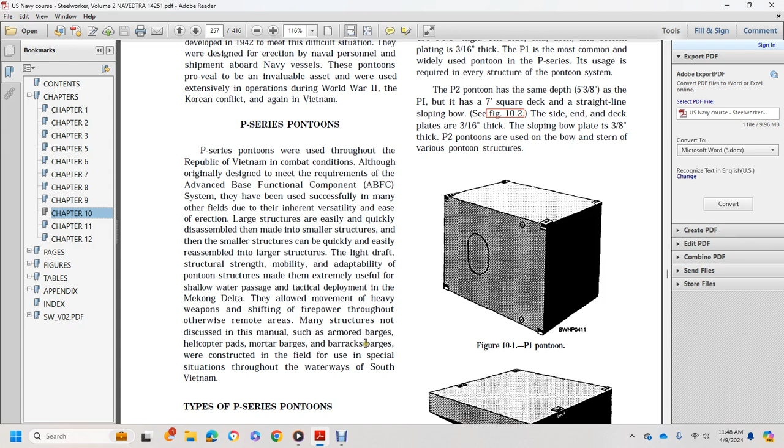Shallow water passage and tactical deployment in the Mekong Delta. They allowed movement of heavy weapons, shifting firepower throughout otherwise remote areas. Many structures not discussed in this manual, such as armored barges, helicopter pads, mortar barges, and barracks barges, were constructed in the field for use in special situations throughout the waterways of South Vietnam.

Types of P-Series pontoons. Five basic P-Series pontoons are used today: P1, P2, P3, P4, P5. These pontoons are specially designed, internally reinforced welded steel cubes. They are tested with an internal pressure of 20 pounds per square inch. All pontoons have plain deck plates covered with a non-skid coating and are fitted with a 2-inch plugged hole, air drain and siphon connections at the top and bottom of one end.

The P1 pontoon is cubical in shape. See Figure 10.1. The deck of the P1 is 5 foot 3 1/8 inches by 7 foot, with sides 5 foot 3 1/8 inches high. Side, end, deck, and bottom plating is 3/16 of an inch. The P1 is the most common, widely used pontoon in the P-Series, and its usage is required in every pontoon structure system.

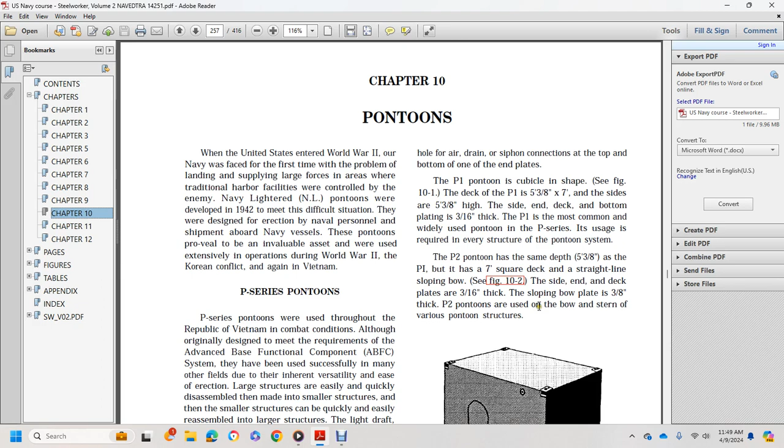The P2 pontoon has the same depth of 5 foot 3 1/8 inches as the P1, but has a 7 foot square deck and a straight line sloping bow. See Figure 10.2. The side, end, and deck plates are 3/16 of an inch, and the sloping bow plate is 3/8 of an inch thick. The P2 pontoons are used on the bow and stern of various pontoon structures. Figure 10.1 shows the P1 pontoon. Figure 10.2 shows the P2 straight line sloping bow pontoon.

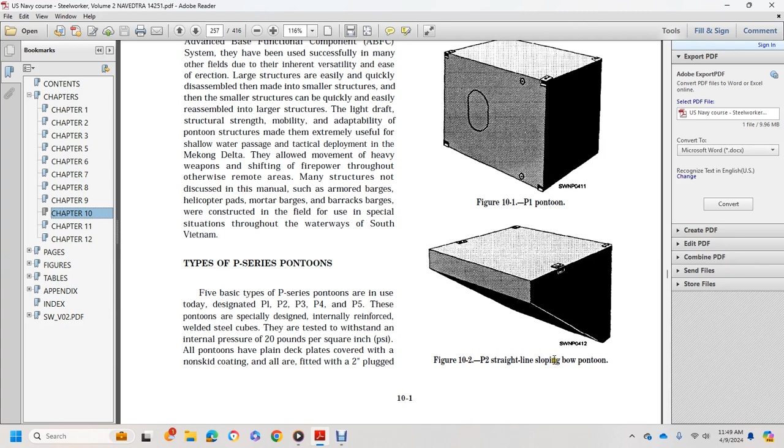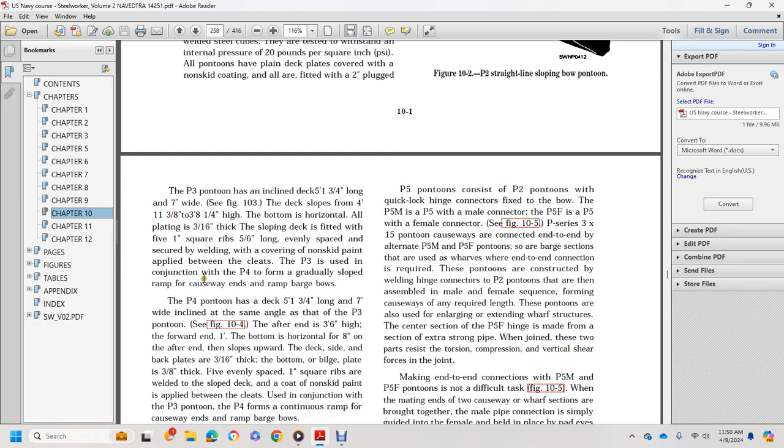Alright, the P3 pontoon has an inclined deck 5 foot 1 3/4 inches long and 7 foot wide. The deck slopes from 4 foot 11 3/8 inches to 3 foot 8 1/4 inches. The bottom is horizontal, with plating of 3/16 of an inch. The sloping deck is fitted with 1 inch square ribs, evenly spaced, secured by welding, with a covering of non-skid paint applied between the cleats. The P3 is used in conjunction with a P4 to form a gradual slope ramp for causeway ends and ramp barge bows.

The P4 pontoon has a deck 5 foot 1 3/4 inches long and 7 foot wide, inclined at the same angle as the P3 pontoon. The after end is 3 foot 6 inches high; the bottom is horizontal for 8 inches at the after end and then slopes upward. Deck, side, and back plates are 3/16 of an inch thick. Bottom and bilge plates are 3/8 of an inch thick.

Finally, 5 evenly spaced 1 inch square ribs are welded to the sloped deck, with non-skid paint applied between the cleats. Used in conjunction with a P3 pontoon, the P4 forms a continuous ramp for causeway ends and ramp barge bows. Figure 10.3 shows the P3 sloped deck pontoon. Figure 10.4 shows the P4 ramp end pontoon.

The P5 pontoons consist of P2 pontoons with quick lock hinge connectors fixed to the bow. The P5M is the P5 with a male connector. The P5F is the P5 with a female connector. See Figure 10.5. P-Series 3 by 15 pontoon causeways are connected end to end by alternate P5M and P5F pontoons, as are barge sections or wherever end-to-end connection is required. Pontoons are constructed by welding hinges to the P2 pontoons, then assembled in male-female sequence, forming causeways of any required length. The pontoons are also used in enlarging and extending structures.

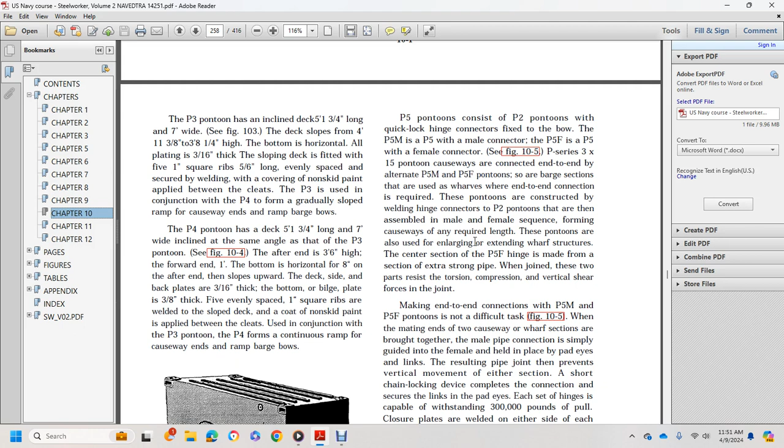The center section of the P5F hinge is made of extra strong pipe, which, when joined with the two parts, resists torsion, compression, and vertical shear force of the joint.

Making an end-to-end connection of P5M male and female pontoons is not a difficult task. When the mating ends of the two causeway wharf sections are brought together, the male connecting pipe is simply guided into the female and held in place with pad eyes and vertical links, resulting pipe joint that prevents vertical movement at either section.

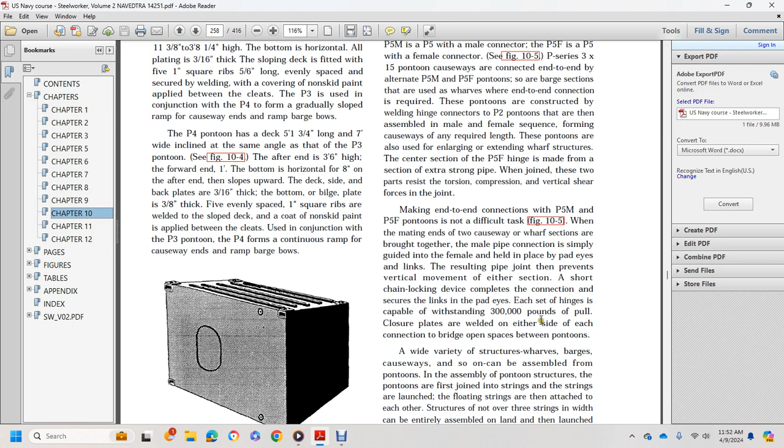To assemble the pontoon structure, the pontoons are first joined and strings are formed. Floating strings are then attached to each other. Structures not over 3 strings wide can be entirely assembled on land, then launched as a unit.

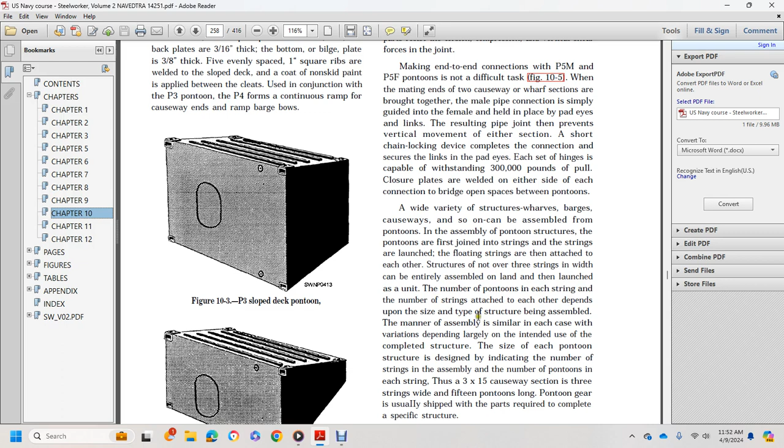The number of pontoons in each string and the number of strings attached depends upon the size and type of structure being assembled. The manner of assembly is similar in each case, with variation depending largely on the intended use of the completed structure. The size of each pontoon structure is designated by indicating the number of strings.

Assembly size is also designated by the number of pontoons in each string. For example, there are 3 by 15 causeway sections, meaning 3 strings wide and 15 pontoons long. Pontoon gear is usually shipped

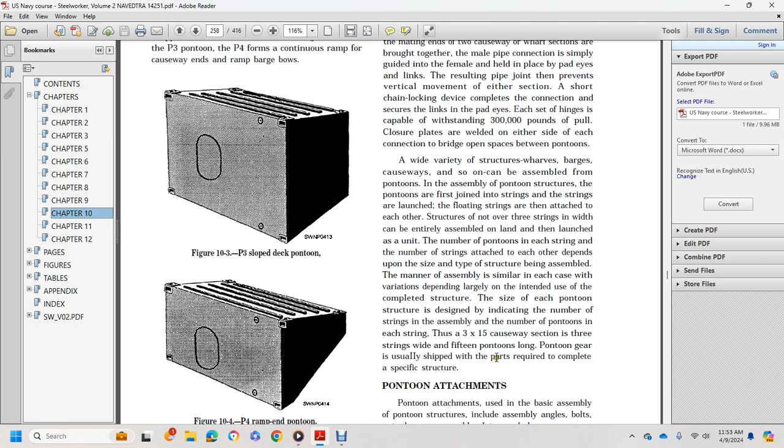with the parts required to complete the specific structure. Pontoon attachments used in basic assembly of pontoon structures include assembly angles, bolts, nuts, keepers, assembly plates, and closures.

Figure 10.5 shows the end-to-end connection of P5 male and P5 female pontoons. The male is on the bottom, the female is on top. It also shows the pad closure and assembly pad.

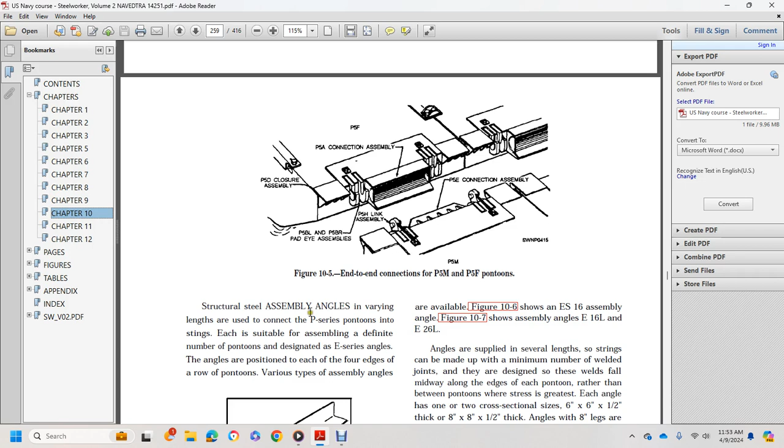Each assembly has a definite number of pontoons designated with the E series angle, with the angles positioned at each of the 4 edges of the row. Various types of pontoon assembly angles are available, shown in Figure 10.6.

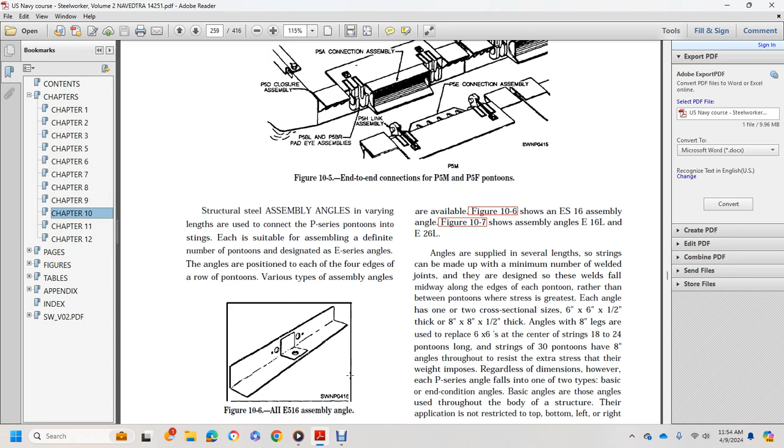Figure 10.6 shows the ES16 assembly, and Figure 10.7 shows the E assembly angles E16L and 26L. These angles are supplied in several lengths so that strings can be made with a minimum number of weld joints.

These designs place the welds midway along the edge of each pontoon, rather than between the pontoons where stress is greatest. Each angle is available in 1 of 2 cross-sectional sizes: 6 inches by 6 inches by 1/2 inch thick, or 8 inches by 8 inches by 1/2 inch thick.

Angles with 8-inch legs are used to replace the 6 by 6 angles on the center strings, which are 18 to 24 pontoons long. Strings of 30 pontoons have an 8-inch angle throughout to resist the extra stress imposed by their weight.

Regardless of dimension, however, the P-series angle falls into one of two types: basic angles or end condition angles.

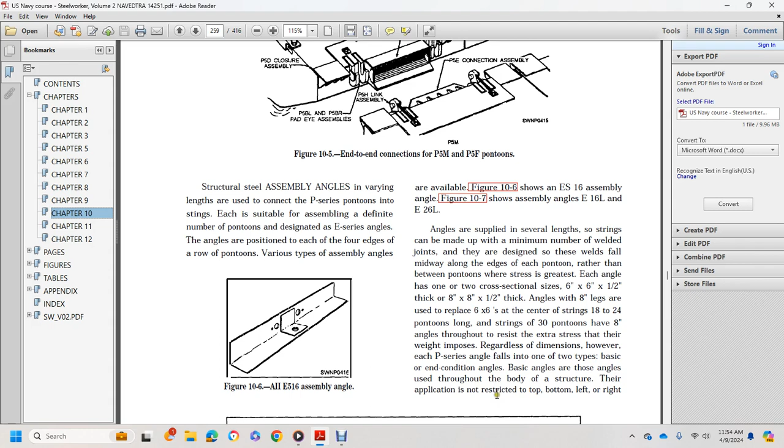Basic angles are those used throughout the body of the structure; their application is not restricted to the top, bottom, left, or right. Figure 10.6 shows the ES16 assembly angle, and assembly angles E16L and E26L are shown in Figure 10.7.

End condition angles, on the other hand, are used for the P2, 3, and 4 pontoon strings, each designated for a specific orientation: top and bottom, right and left.

Basic angles are shortened or lengthened to make up modified configurations. End condition angles can be cut and formed from basic angles to meet abnormal requirements.

The A6B assembly bolt is 1.5 inch diameter by 3 and 3/8 inch long, with a hexagonal head, a coated steel bolt with 3 radial grooves in the head spaced 120 degrees apart, rated grade 5 steel with a tensile strength of 105,000 psi.

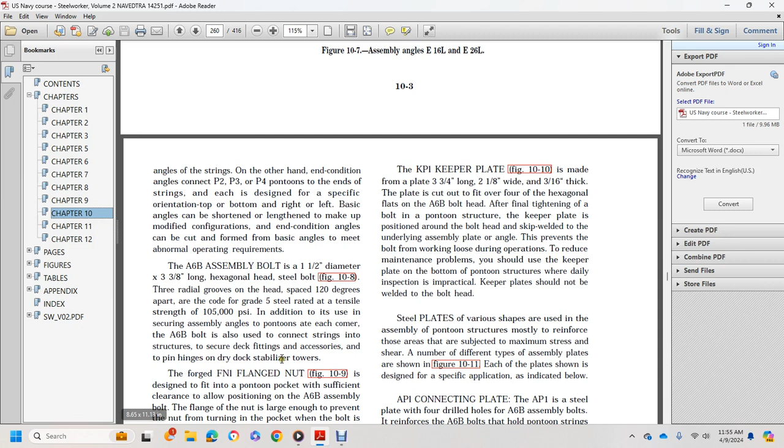In addition to securing the assembly angle at each corner of the pontoon, the A6B bolt is used to connect strings into structures, secure deck fittings and accessories, and pin hinges on dry dock stabilizer towers. The forged FN1 flange nut, shown in Figure 10.9, is designed to fit into the pontoon pocket with sufficient clearance to allow positioning of the A6B assembly bolt.

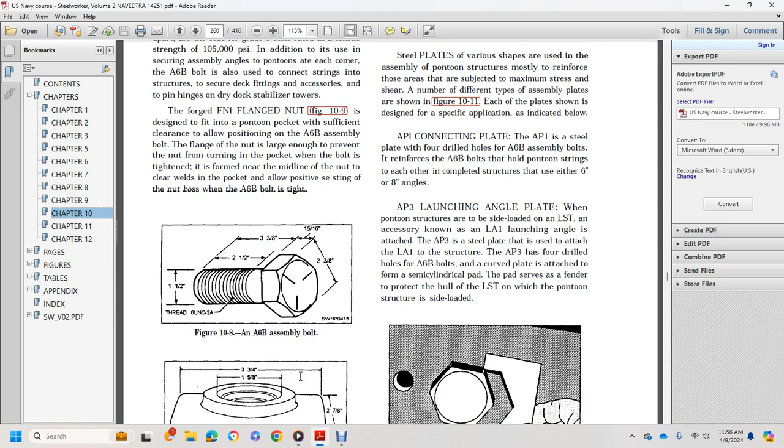Figure 10-8 shows the A6B assembly bolt and the FN1 flange nut. The KP1 keeper plate is made with a plate 3 3/4 inches long by 2 1/8 inches wide by 3/16 thick, and the plate is cut out to fit over the hexagonal flats of the A6B bolt head.

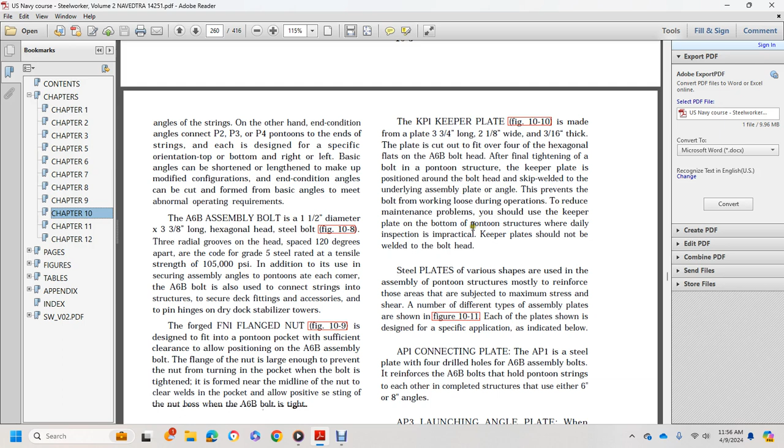After finally tightening the bolt, in a pontoon structure, the keeper plate is positioned around the bolt head and skip welded to the underlying assembly plate or angle. This prevents the bolt from working loose during operation. To reduce maintenance problems, use the keeper plate on the bottom of the pontoon structures where daily inspection is impractical. The keeper plate should not be welded to the bolt head.

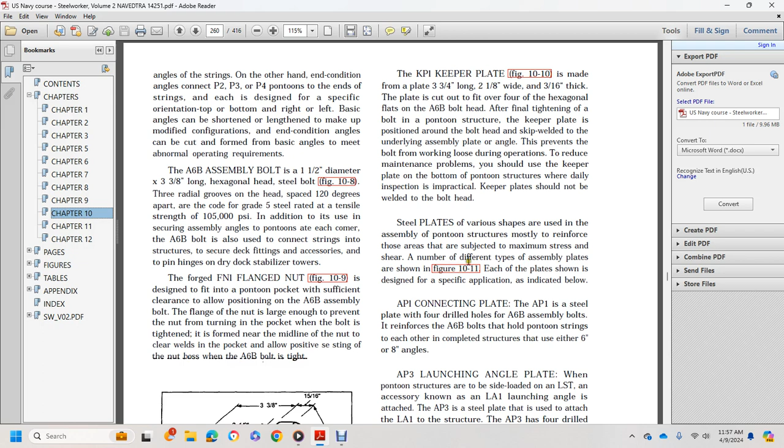Steel plates of various shapes are used in assembly with the pontoon structures, mostly for reinforcing areas subjected to maximum stress. A number of different types of assembly plates are shown in Figure 10-11, each designated with a specific application indicated below.

The AP1 connecting plate is a steel plate with 4 drilled holes for the A6B assembly bolts, used to reinforce the A6B bolts and join pontoon strings to each completed structure with either 6-inch or 8-inch angles.

The AP3 launching angle plate is used when pontoon structures are side-loaded onto the LST, using accessories known as the LA1 launching angle attachment. The AP3 is a steel plate used to attach the LA1 structure, and it has 4 drilled holes.

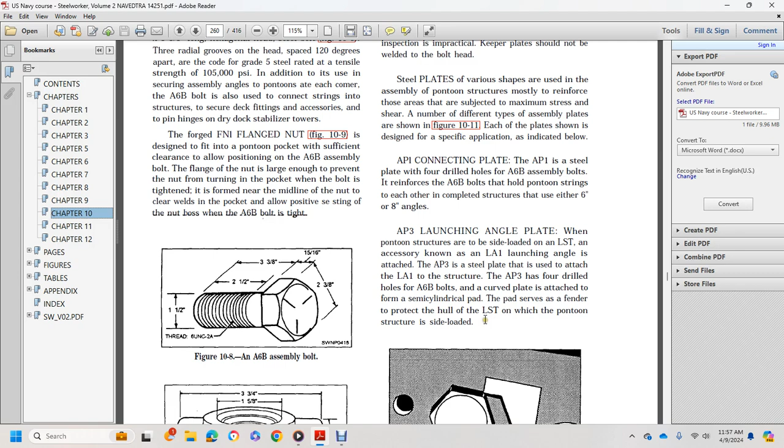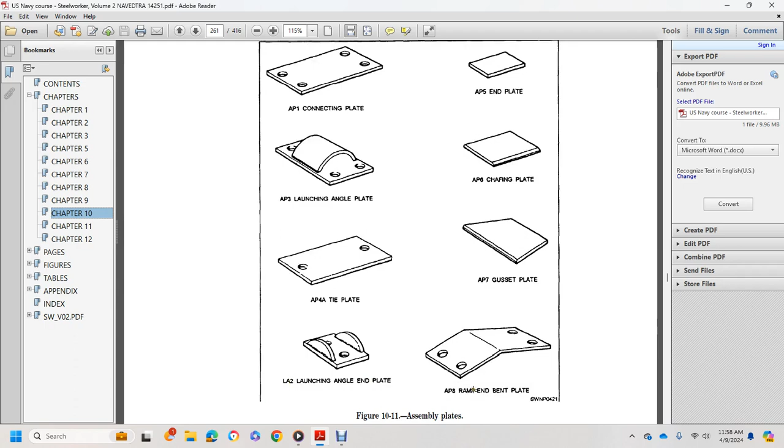The AP4A tie plate is a steel plate with 2 drilled A6B holes used to connect pontoon strings to each other at the bow and stern ends where necessary, as an acceptable substitute. AP4A can be obtained by cutting the AP1 connection plate in half across the narrower dimension; 2 plates are produced for both.

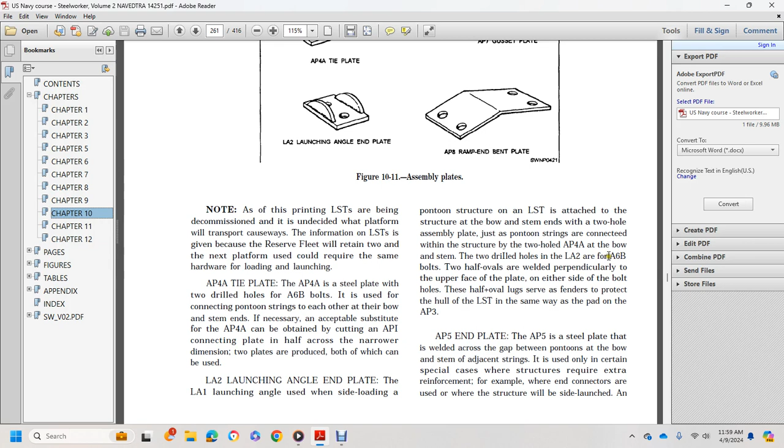Two half-oval lugs are welded perpendicular to the upper face of the plate on either side of the bolt. These half-oval lugs serve as a fender to protect the hull of the LST in the same way as the AP3 pad.

The AP5 end plate is a steel plate welded across the gap between the pontoons at the bow and stern of adjacent strings, used only in certain special cases where structures require extra reinforcement, for example where end connectors are used on side-launched structures.

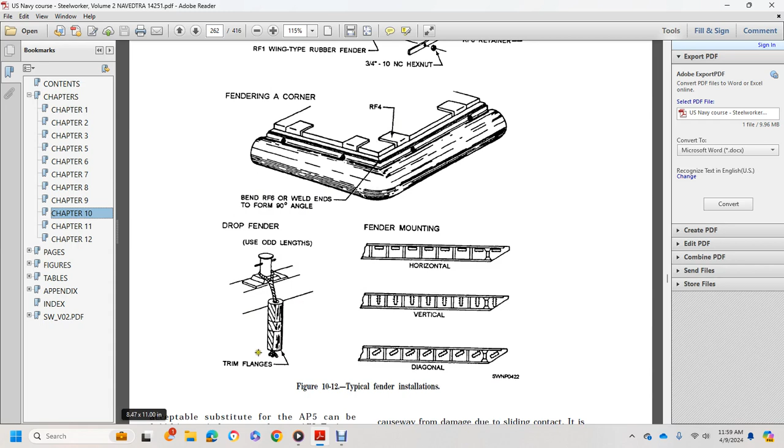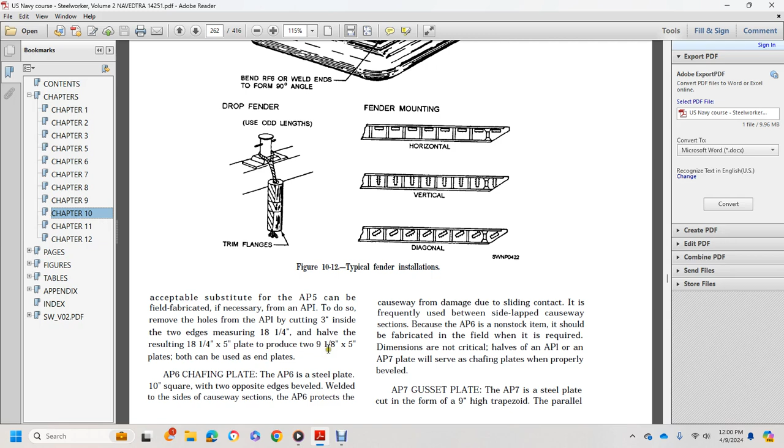The AP6 chafing plate is a steel plate, 10 inches square, with 2 opposite edges beveled, welded to the sides of the causeway section. AP6 protects the causeway from damage due to sliding contact. It is frequently used between side-lapped causeway sections, and since AP6 is a non-stock item, it should be fabricated in the field when required; dimensions are not critical.

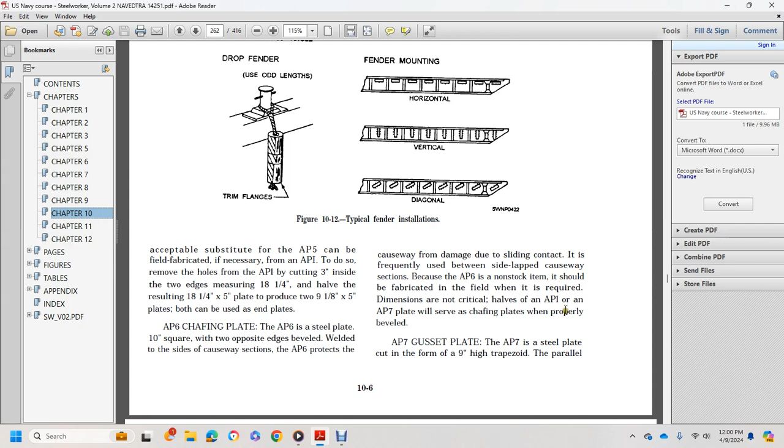The AP1 or AP7 plate will serve as a chafing plate when properly beveled. The AP7 gusset plate is a steel plate formed as a 9-inch high trapezoid with parallel sides.

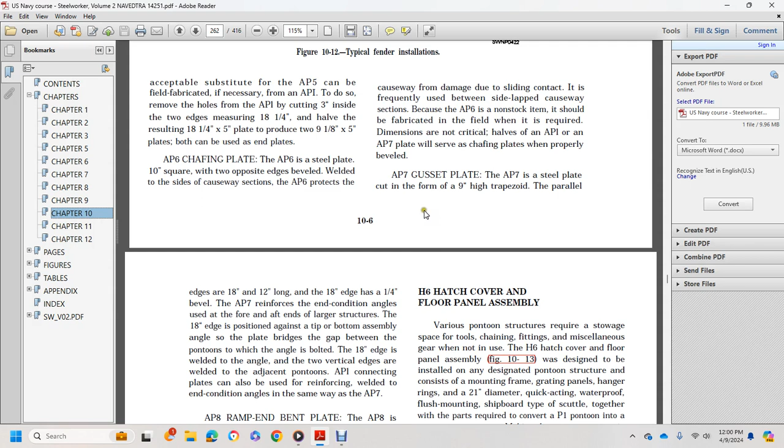Edges 18 inches and 12 inches long with the 18-inch edge at a 1/4 inch bevel. The AP7 reinforces the end condition angle with the end of the large structure for the 18-inch edge position against the tip of the bottom of the angle plates, bridging the gap between the pontoons. The angle's 18-inch edge is welded to the angle, and the two vertical edges are welded to adjacent pontoons.

The AP1 connection plates can also be used for reinforcing, welded to the end condition angle, same as the AP7 plate.

The AP8 ramp end bent plate is a fabricated steel plate, 11 inches by 20 and a quarter inches, rectangular, bent for the two legs, 8 and 5/8 of an inch over the 11 and 5/8 of an inch long. Each leg has 2 drilled holes.

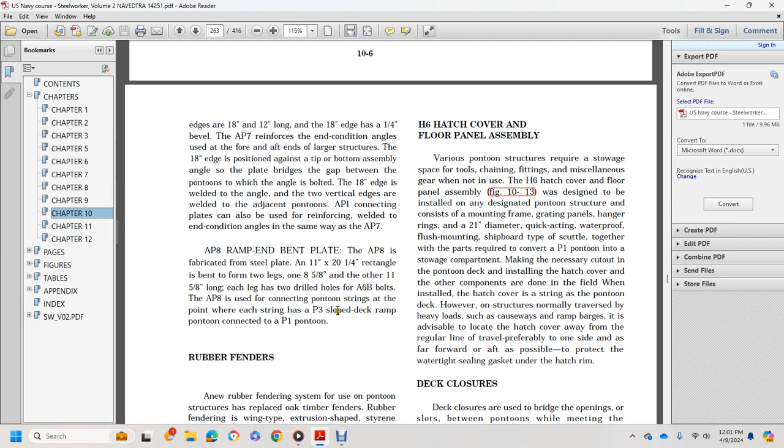The A6B bolts the AP8 using the connection pontoon strings over the point where each string connects with the P3 slope deck ramp pontoon connected in the P1 pontoon.

Rubber fenders. A new rubber fendering system is found on the pontoon structures, replacing the oak and timber fenders with the rubber fendering wing type.

The extrusion shape of the styrene butadiene composition is supplied in random lengths, cut, formed, and fitted to the specific structure's operating conditions.

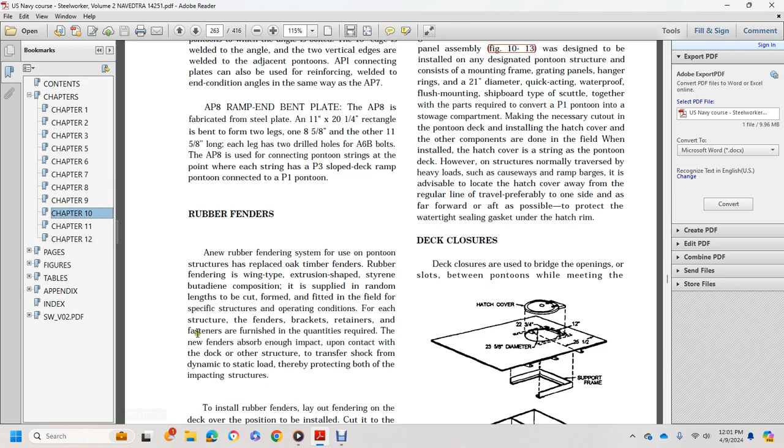Structure fender brackets, retainers, and fasteners are furnished in quantities required by the new fenders to absorb enough impact from contact with the dock or other structures, transferring shock from dynamic to static loads, thereby protecting the pontoon structures.

To install rubber fenders, lay out with the fender deck over the position, installed and cut to the required bolt length, with the retainer bracket positioned using attached lines. Tack weld brackets are placed with temporary removal of the lines.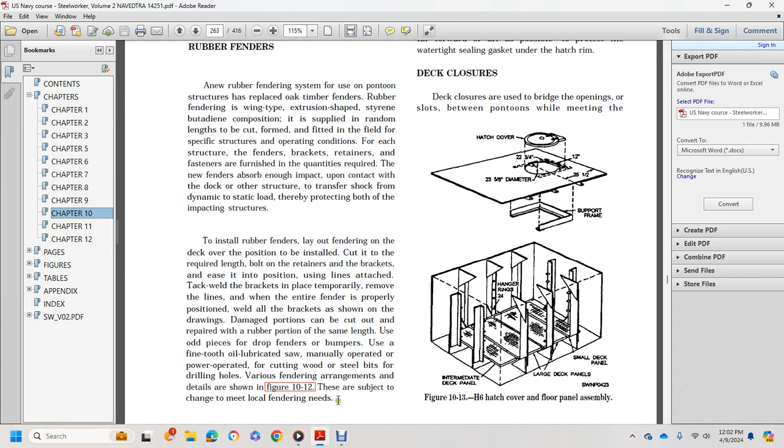Use an odd piece for the drop fenders or bumpers. Use a fine-tooth, oil-lubricated saw, manually or power operated, for cutting wood or steel bits, and drill holes for various fendering arrangements. Details are shown in Figure 10-12. They are subject to change to meet local fendering needs.

Figure 1013, designed to install on any designated pontoon structure, consists of mounting frames, grating, panels, hangers, rings, and a 21-inch diameter quick-acting waterproof flush mounting shipboard type scuttle, together with the parts required to convert a P1 pontoon into a storage compartment.

This requires making necessary cutouts in the pontoon deck and the hatch cover. The other components are installed in the field, fitting the hatch cover to the string in the pontoon deck.

However, since the structure is normally traversed by heavy loads such as causeways, ramps, and barges, it's advisable to locate the hatch cover away from the regular line of travel, preferably to one side, as far forward and aft as possible, to protect the watertight sealing gasket of the hatch rim.

Deck closures are used to bridge openings and slots between pontoons while meeting them. Alright, showing the hatch cover.

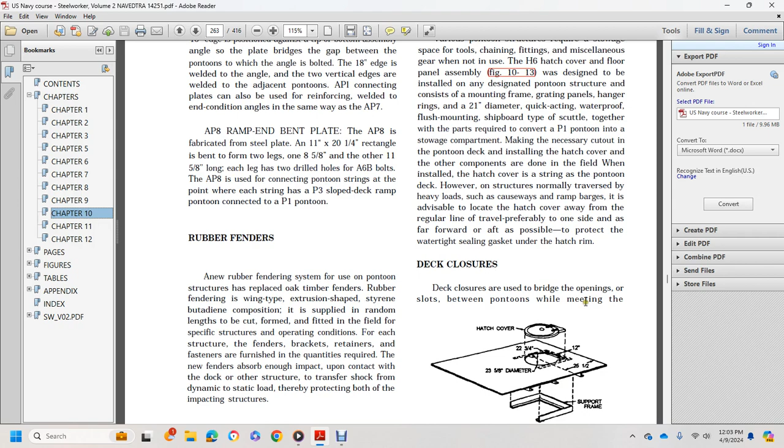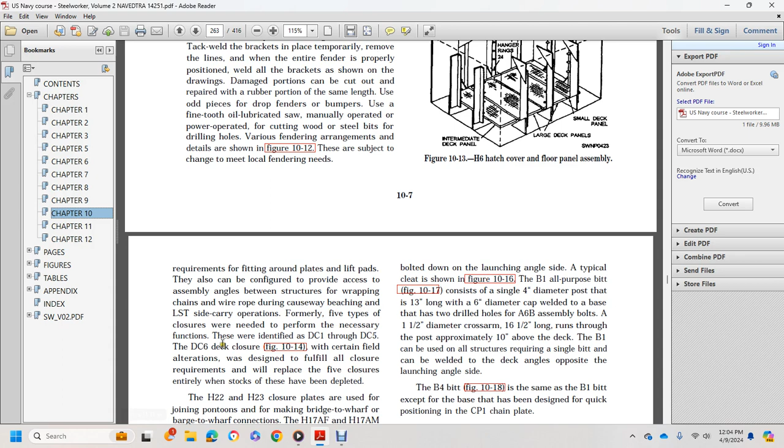For LST side-carry operations, there are formerly 5 types of closures needed to perform the necessary function. Identified as DC1 through DC5, deck closures will certainly be field-altered as needed to fulfill all closure requirements.

The H22 and H23 closures are not included in the heavy-duty hinge set, but are fabricated in the field as required. Bitts and cleats are steel posts with arms to which lines are secured for structural or side carrying, and should have bits as well as deck fittings. DC deck closure.

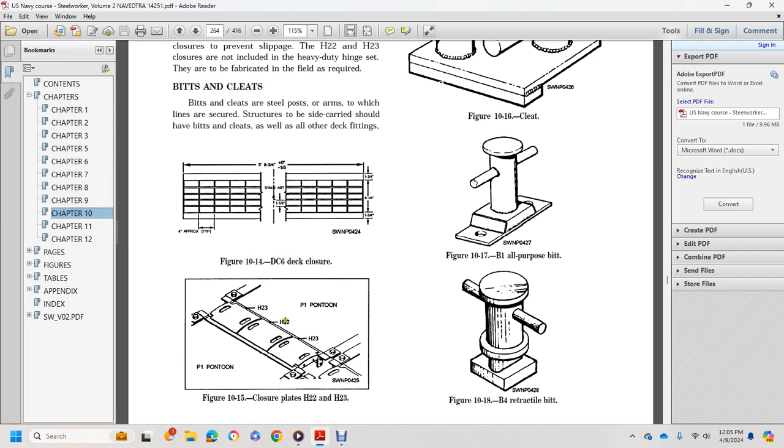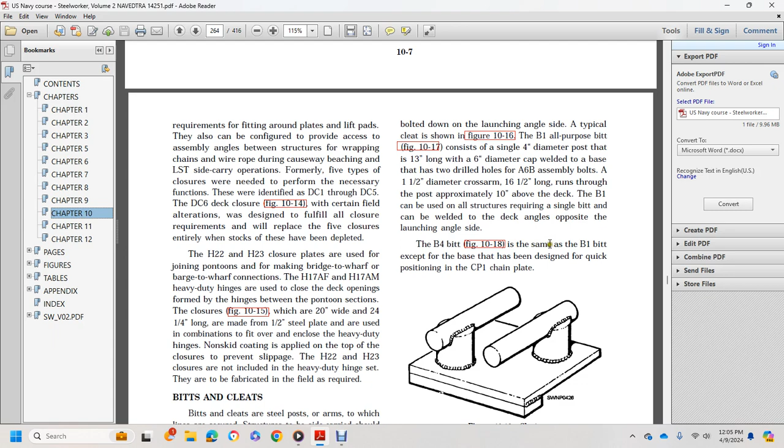B1 can be used on all structures requiring a single bit, but can be welded to deck angles opposite the launching angle side. The B4 bit is the same as the B1 bit, except that the base has been designed as a quick position with a CP1 chain plate. Alright, so 1016 shows the cleat, 1017 shows the B1 all-purpose bitt, then 18 shows the B4 retractile bitt. The M147 double bitt consists of 8-inch steel pipe, 20 inches long, welded to a 13 by 40-inch base plate at the upper ends.

Propulsion unit. Self-propelled pontoon barges and tugs are powered by the outboard propulsion unit. These units have been specially designed to be readily installed on tugs and barges of any size. The propulsion unit shown in figure 1020 is essentially a heavy-duty outboard motor consisting of a propulsion mechanism and marine diesel engine mounted on a heavy structural base. Propulsion power is carried from the engine through the right angle housing and vertical drive housing to the propeller, steering being effected by shifting the propulsion force direction.

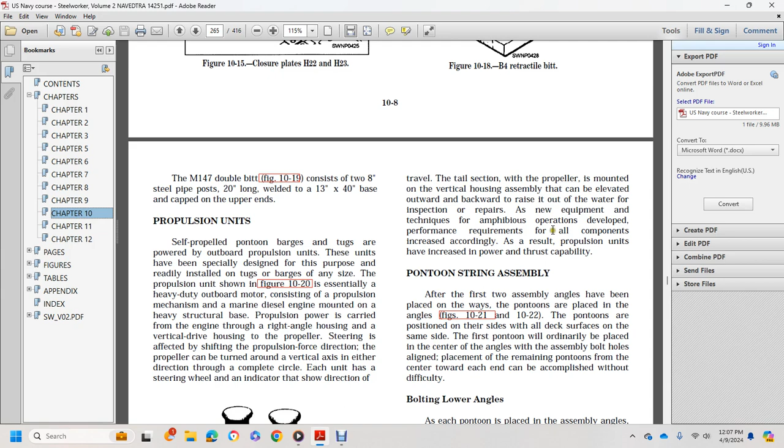Propellers can be turned about the vertical axis in either direction for a complete circle. Each unit has a steering wheel and an indicator showing the direction of travel. The tail section is mounted with a vertical housing assembly that can be elevated back and forward to raise it out of the water for inspection and repairs. As new equipment and techniques for amphibious operations developed, the performance requirements for all of the components increased accordingly, with the role of the propulsion unit to increase the power thrust capability. 1019 shows the M147 bit, 1020 shows the model 295 diesel engine outboard propulsion unit.

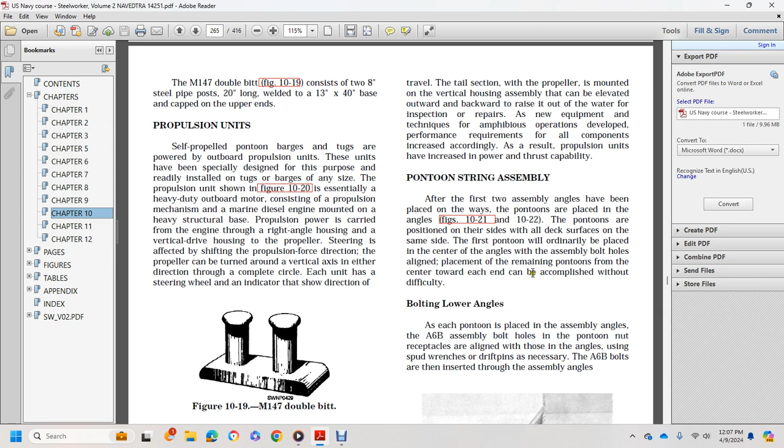Pontoon string assembly. After the two assembly angles have been placed, the pontoons are placed on the angles, figure 1021 and 22, with the pontoons positioned on their sides, all deck surfaces the same side. The first pontoon should be placed in the center of the angles with the assembly bolts in line, and placement of the remaining pontoons from the center toward each end can be accomplished without difficulty. Bolting lower angles.

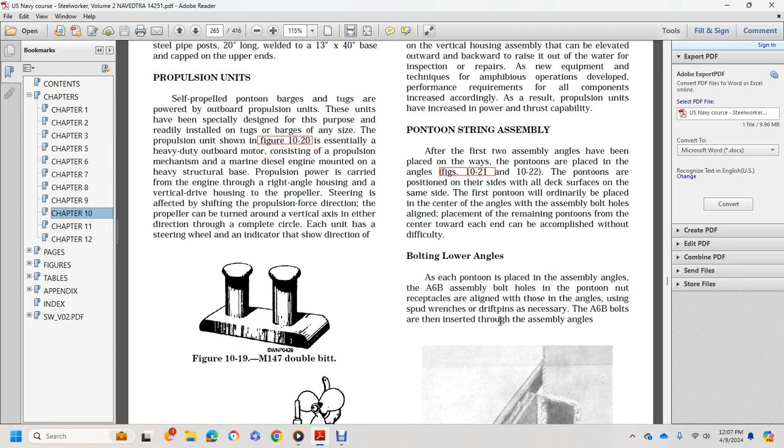Each pontoon is positioned with the assembly angle A6B bolt holes in line with the pontoon nut receptacles. Align those angles using spud wrenches and drift pins as necessary. A6B bolts are then inserted through the assembly angles. 1021 shows the pontoon position on the assembly. Figure 1022 shows placing pontoons on the assembly angles; start by hand to thread the female FN1 nut. Bolts should be snugly tightened and backed off one turn.

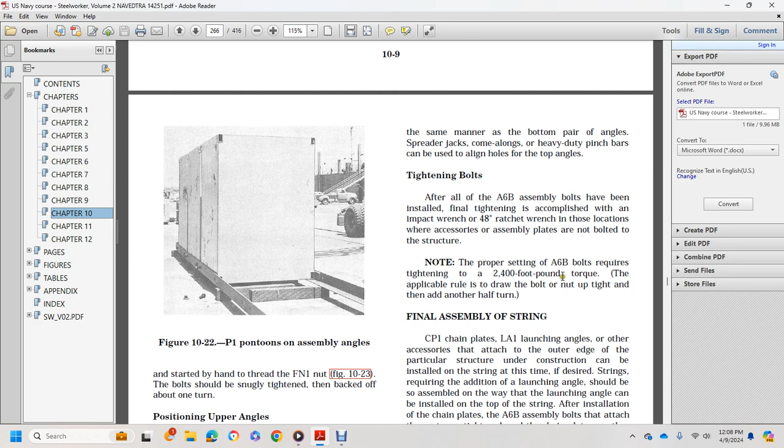Upper angle: the second pair of assembly angles is placed on top of the pontoons and bolted. 1023 shows the A6B bolt and FN1 nut connecting the pontoon and assembly angle. In the same manner as the bottom pair, angle spreader jacks along with a heavy duty pinch bar can be used to line up the top angle, then tighten bolts after all A6B assemblies have been installed, with final tightening accomplished with an impact wrench or 48-inch ratchet wrench, locating accessory assembly plates not bolted to the structure. Note the proper setting of the A6B bolts requires tightening to 2,400 pound-foot torque. The applicable rule is to draw the bolt nut up tight and then add another half turn.

Final assembly of the string: the CP1 chain plates, LA1 launch angles or other accessories attached to the outer edge of the particular structure under construction can be installed on the string at any time. If the desired string requires it, additional launching angles should be assembled, with the launching angle initiated at the top of the string. After installation of the chain plates, A6B assembly bolts are then attached. Tighten with the chain plates, or other accessory items are welded.

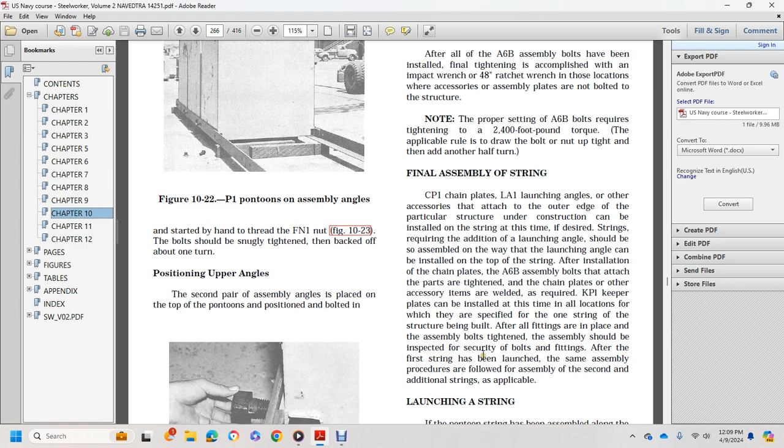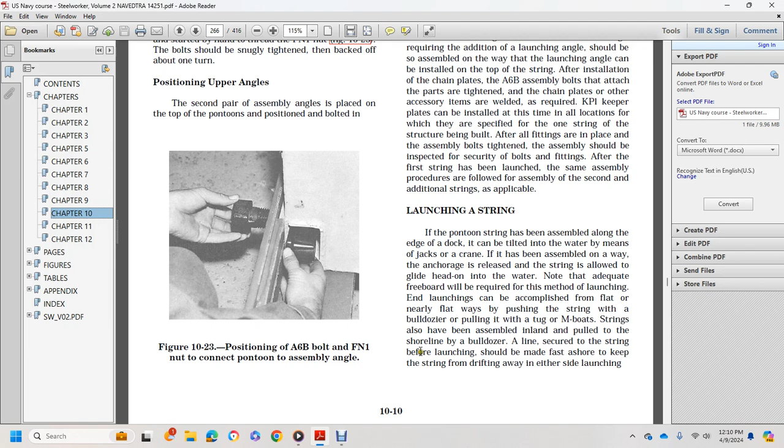End launchings can be accomplished on flat or nearly flat ways, pushing the string with the bulldozer or pulling it in with a tug with the M-boat. The string also has been assembled inland and pulled into the shoreline by a bulldozer. Lines secured to the string before launching should be made fast on shore to keep the string from drifting away on either side of launching. Ends of each line can be assured that the string rights itself when launched.

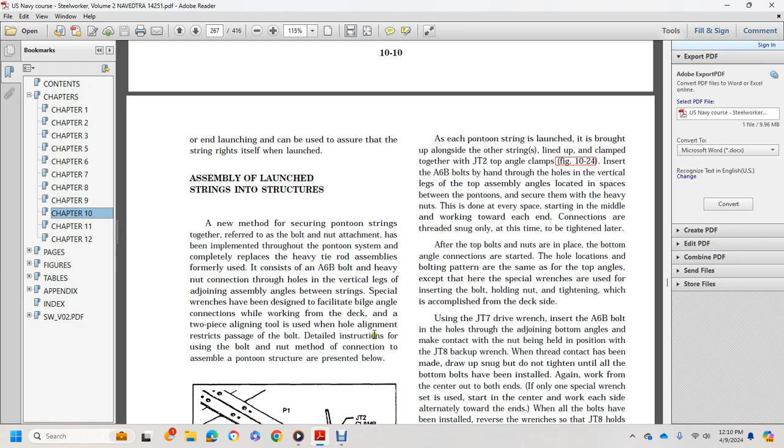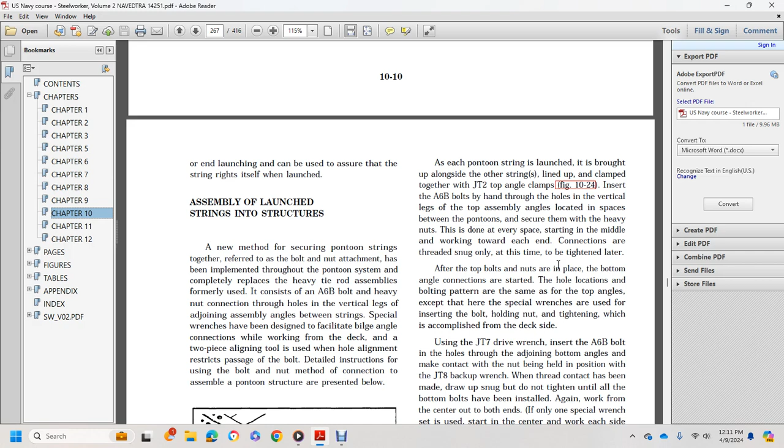At each pontoon string, the launcher is brought alongside the other string and lined up to clamp together with the JT2 top angle clamps. Insert the A6B bolt by hand through the holes on the vertical leg at the top, located in the space between the pontoons. Screw them on with heavy bolt nuts. This is done in every space of the string, from the middle working toward the ends. The connections are threaded snug only at this time, to be tightened later.

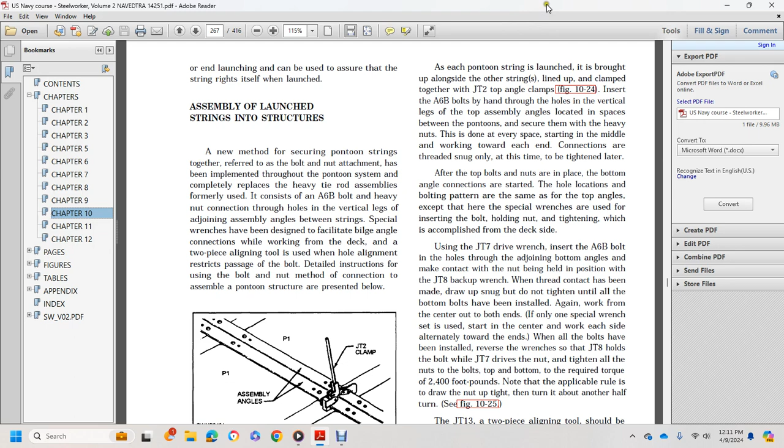After the top bolt nuts in place for the bottom of the angle connection. Start with the hole of the location bolting pattern. Same with the top angles; the special wrenches are used for inserting bolts, holding nuts and tightening, which is accomplished from the deck side. Using the JT7 drive wrench, insert the A6B bolt in the holes joining the bottom angle, with the nut being held in position by the JT8 backup wrench. When thread contact has been made, draw up snug; do not tighten until all the bottom bolts have been installed.

Again, work from the center to both ends. If only one special wrench set is used, start at the center and work on each side alternately towards the ends. When all bolts have been installed, reverse the wrenches; the JT8 holds the bolt. With the JT7 drive unit, tighten all of the nuts and bolts at the top and the bottom with the required torque of 2,400 foot-pounds. The applicable rule is to draw the nut up tight and then turn it about another half turn, see figure 1025.

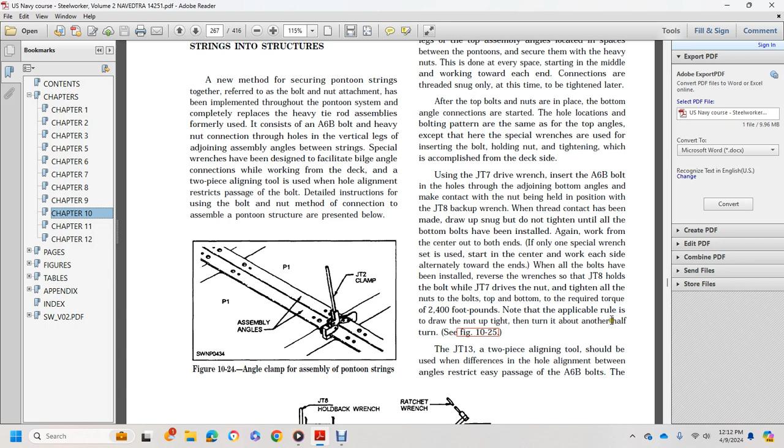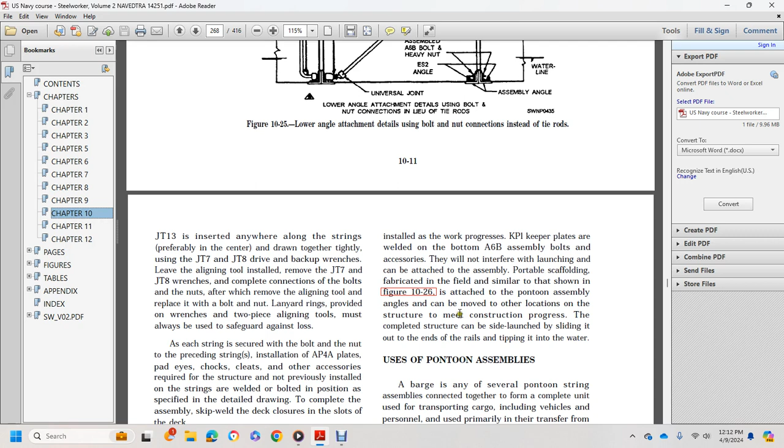JT13 is a two-piece aligning tool. Should the difference of hole alignment between angles restrict easy passage of the A6B bolts, the JT13 is inserted anywhere along the strings, preferably in the center, and drawn together using the JT7 drive and the JT8 backup wrench. Leave the aligning tool on, install and remove the JT7 and JT8 wrenches. Complete connection of the bolts and nuts, after which remove the aligning tool and replace the bolt and nut. Lanyard rings are provided with the wrench. The two-piece aligning tools must always be safeguarded against loss.

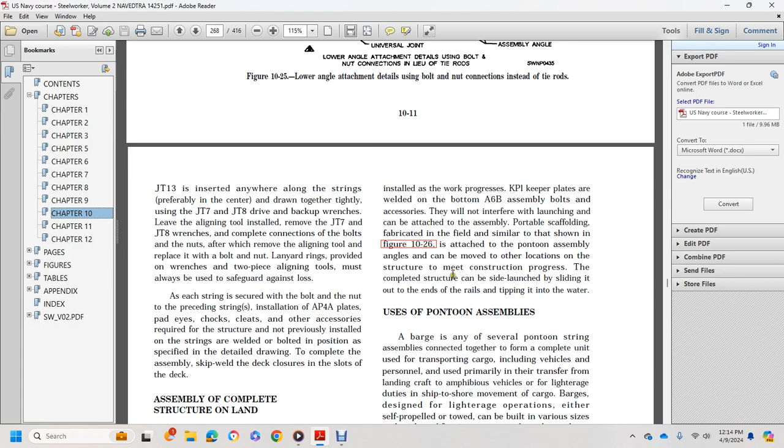The completed structure can be side launched by sliding it out at the end of the rail, tipping it into the water. Using pontoon assemblies, a barge is several pontoon string assemblies connected together to form a complete unit for transporting cargo, including vehicles and personnel, used primarily for transfer from landing craft to amphibious vehicles, lighterage duties and ship-to-shore movement of cargo.

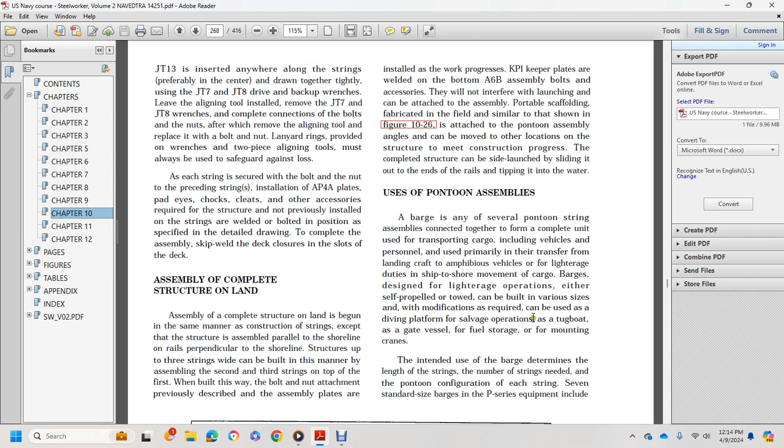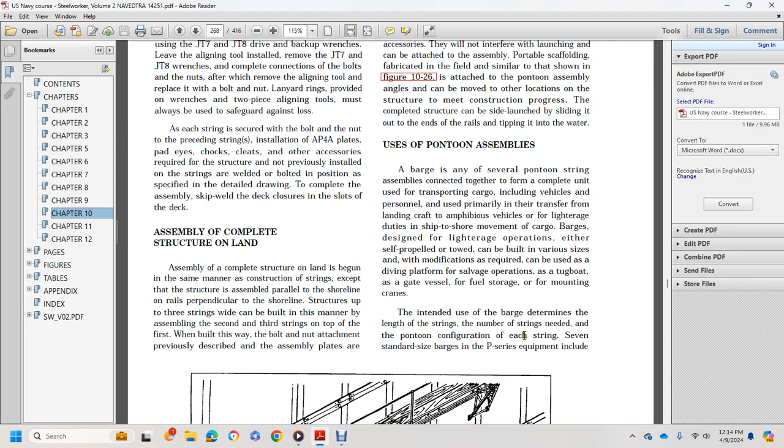Either self-propelled or towed, barges can be built in various sizes and, with the modifications required, used for salvage operations, as tugboats and gate vessels, for fuel storage, or for mounting cranes. The intended use of the barge determines the length of the string, the number of strings needed and the pontoon configuration. Figure 1026 shows the portable scaffolding assembly structures in the pier. The P-series includes the following 3x7, 3x12, 4x7, 4x12, 5x12, 6x18, and 10x30 barges.

Conventional pontoon barges sized up to and including the 6x18 barge are designed to carry their own rated load with 1 foot of freeboard; a concentrated center point load heavy enough will bring in deck wash. The 3x7 pontoon barge is a general purpose structure used for lighterage and ferrying operations; cargo transport can be accomplished by tow. It can be self-propelled by mounting a propulsion unit on the end without fender. The 3x7 barge with a propulsion unit is shown in figure 1027.

The 3x12 pontoon ramp barge is ordinarily used for transporting cargo and equipment and has proved suitable for general amphibious operations, with the ramp attached for beaching the barge under its own power. It also helps unload tractors and equipment and assists in forming a causeway pier. The 3x12 barge can be side carried on the LST to the assault area, or the barge can be loaded in the well deck of the LSD.

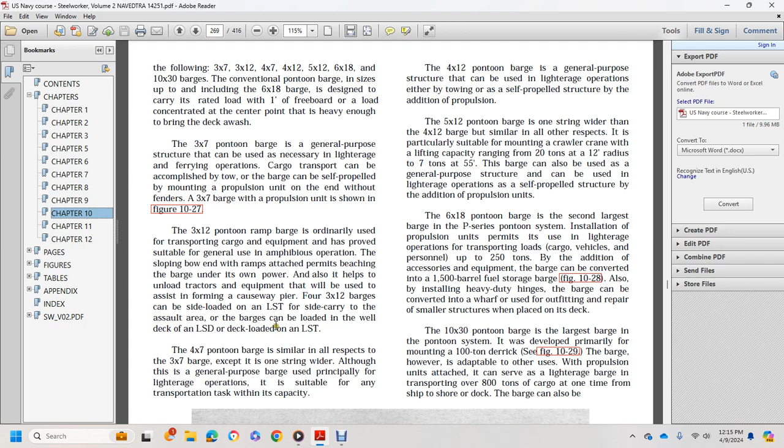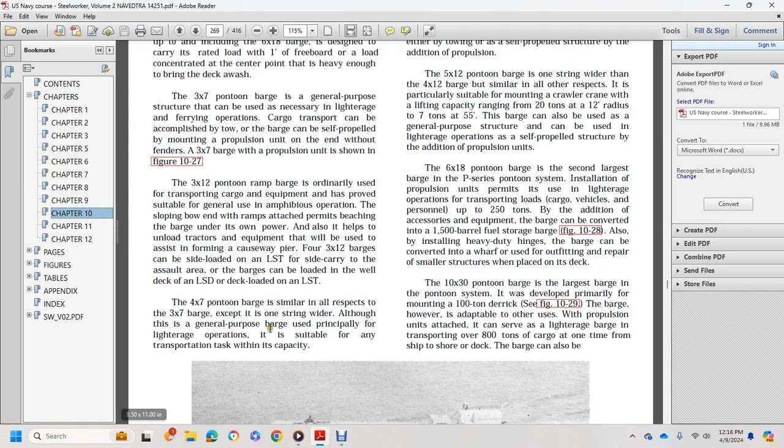The 4x7 pontoon barge is similar in all aspects to the 3x7 barge except it is one string wider; although a general purpose barge with principal lighterage applications, it is suitable for any transport task within its capacity. Figure 1027 shows the 3x7 pontoon barge propulsion unit. The 4x12 pontoon barge is a general purpose structure that can be used in lighterage operations, towed or self-propelled with added propulsion.

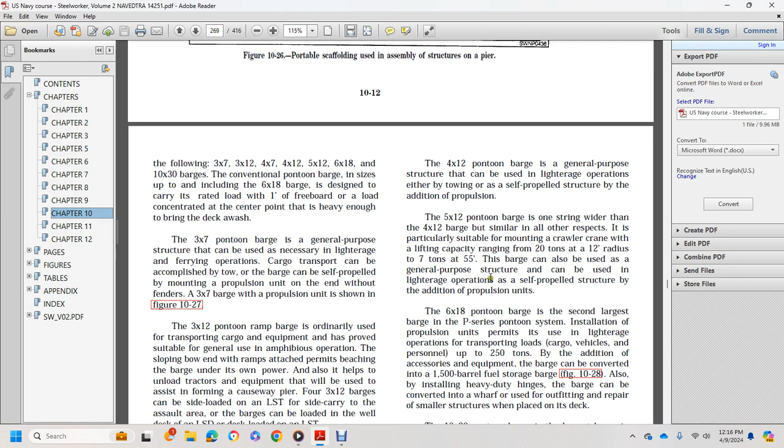The 5x12 pontoon barge, one string wider than the 4x12 barge but similar in all respects, is particularly suitable for mounting a crawler crane with lifting capacity ranging from 20 tons at a 12-foot radius to 7 tons at 55 feet. The barge can also be used as a general purpose structure in lighterage operations, self-propelled by additional propulsion units.

The 6x18 pontoon barge is the second largest barge of the P series. Installed propulsion units permit lighterage operations transporting cargo, vehicles and personnel up to 250 tons. By the addition of accessory equipment, the barge can be converted to a fuel storage barge. With heavy-duty hinges installed, the barge can be converted to a wharf for outfitting and repair with a small structure placed on the deck.

The 10x30 pontoon barge is the largest barge in the pontoon system, developed primarily for mounting a 100-ton derrick. The barge, however, is adaptable to other uses; with propulsion units attached it serves as a lighterage barge transporting 800 tons of cargo at one time from ship to shore or dock.

Barges can also be used, figure 10-28: the 1,500-barrel 6x18 fuel storage barge. Barges are used in piers and wharves, and installed with heavy hinges connected with the existing pontoon wharf to enlarge the extent of the structure.

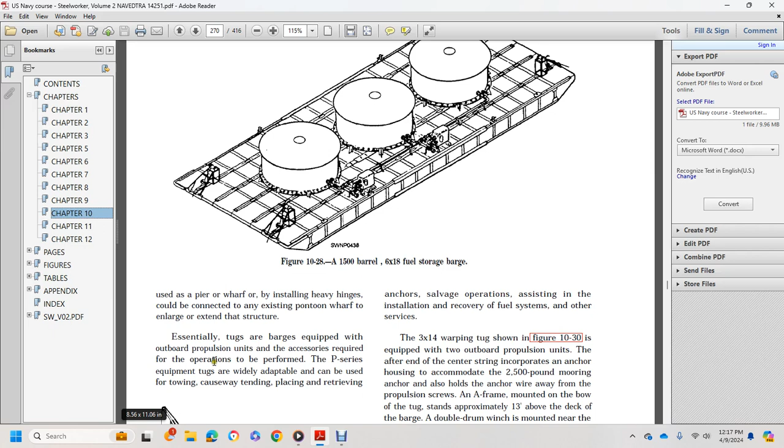Essentially, tugs are barges equipped with outboard propulsion and accessory equipment perform operations with the equipment. Tugs are widely adaptable and can be used for towing, placing and retrieving. Figure 10-29 shows the 100-ton derrick mounted on a 10x30 barge.

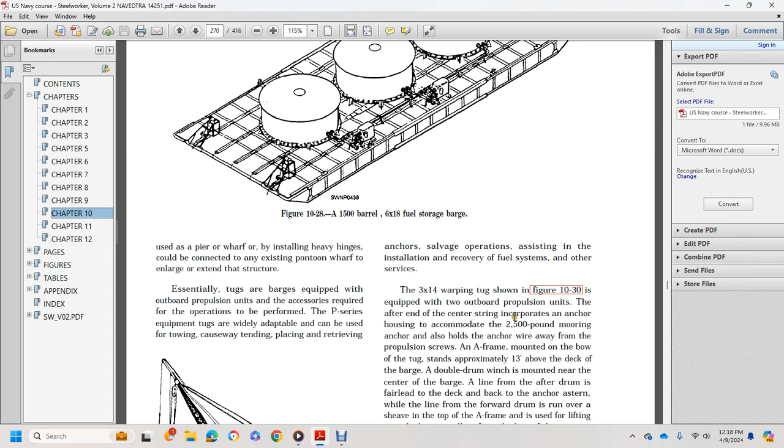Anchors help with the operations in the installation and recovery of fuel systems. The 3x14 warping tug is shown in figure 10-30. It is equipped with two outboard propulsion units at the after end, and the center string incorporates an anchor housing to accommodate a 2,500-pound mooring anchor. To keep the anchor wire away from the propulsion screw, an A-frame is mounted on the tug, standing approximately 13 feet above the deck of the barge.

The double drum is mounted near the center of the barge. Line from the drum and the fairlead is laid on the deck to the anchor at the stern. While the line from the drum runs over the sheave at the top of the A-frame, the sheave lifts it over the bow, pulling the bow during warping. The winch is mounted on a welded steel cross brace frame.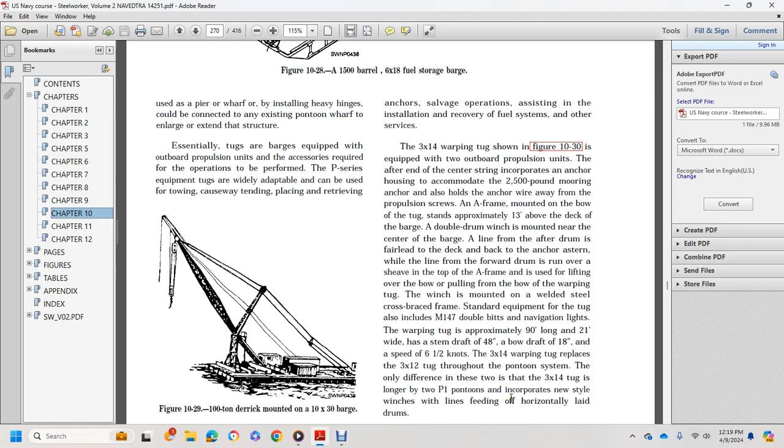Standard equipment for the tug includes the M147 double bitts and navigation lights. The warping tug is approximately 90 feet long, 21 feet wide, with a stern draft of 48 inches, bow draft of 18 inches, and speed of 6.5 knots. The 3x14 warping tug replaces the 3x12 tug in the pontoon system. The only difference is that the 3x14 tug is longer by two P1 pontoons and incorporates new style winches with lines feeding off horizontally laid drums. Figure 10-30 shows the 3x14 warping tug.

A pontoon causeway consists of the inshore and offshore sections and as many intermediate sections as necessary to make up the desired length, up to 1 mile considered possible. Each section is a 3x15 structure. The design load is 105 tons at a freeboard of 12 inches.

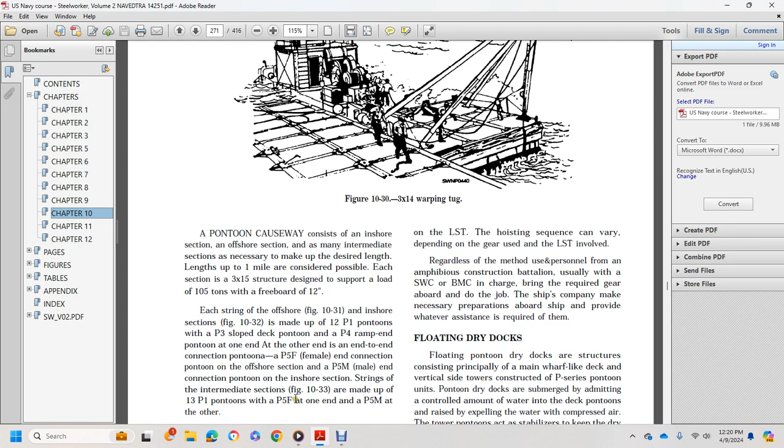Each string of the offshore and inshore sections is made up of 12 P1 pontoons with a P3 slope deck pontoon, or P4 ramp end pontoon, at one end and an end-to-end connection pontoon at the other: a P5 female connection on the offshore section and a P5 male end connection pontoon on the inshore section. Strings of the intermediate section, figure 10-33, are made up of 13 P1 pontoons, with a P5 female at one end and P5 male at the other.

Side-loaded causeways as well as barges are transported to the combat area by LST. To facilitate this, you should weld the hinge rail and shelf brackets on the LST. The LA1 launching angle is on the outboard string of the barge and causeway. The LST is listed far enough to the side being loaded to permit the hinge bar pontoon structure to be hoisted up to the shelf bracket. The structure is hoisted upright either by crane or by winches on the LST; the hoisting sequence varies depending on the gear of the LST involved.

Regarding the personnel of the Amphibious Construction Battalion, usually an SWC or BMC is in charge of bringing the required gear aboard to do the job on the ship. The company makes the necessary preparations aboard ship and provides whatever assistance is required of them.

Floating dry docks. Floating pontoon dry dock construction consists principally of a wharf-like deck with vertical side towers constructed with pontoons. The dry dock deck is submerged by admitting a controlled amount of water into the deck pontoons, and raised by expelling the water with a compressor from the tower pontoon tanks. Stability, keeping the dock level, is done with the towers. The dry docks require 18 feet of water to be submerged, with the decks at 12 inches maximum.

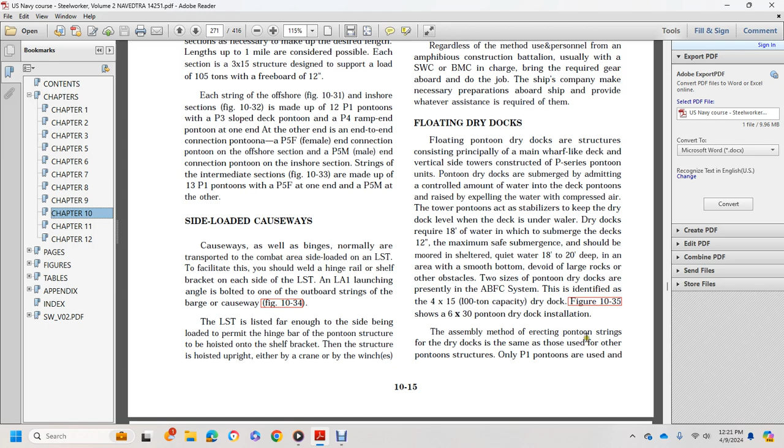For safe submersion, it shall be moored in sheltered quiet water 18 to 20 feet deep in an area with a smooth bottom, to avoid large rocks and other obstacles. Two sizes of pontoon dry docks are present in the ABFC system, identified as the 4x15 100-ton capacity dry dock and the 6x30 pontoon dry dock installation. These are made by erecting pontoon strings, the same as used in other pontoon structures. Only P1 pontoons are used.

And this shows a figure 10-31, the offshore causeway section. Figure 10-32 shows the inshore causeway section. See detail A and B.

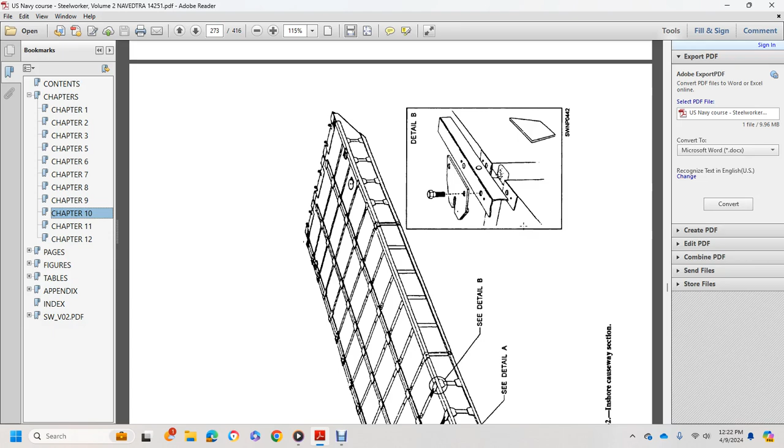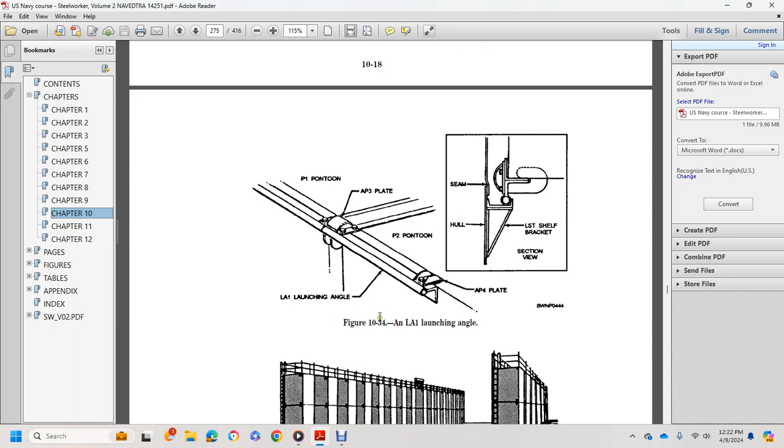1035 shows a 6x30 400-ton pontoon dry dock. They are made up into strings, launched, and joined in the water, same as the other structures. Before pontoon construction, dry dock drawings should be prepared with details showing the type, the location, and parts, together with field erection information. Make available the applicable dry docks to be erected at all times during the initial construction stage. Ensure the main parts are properly located, positioned, and secured during the final stage.

Elevated causeway section. The elevated causeway pier facility provides a link between lighterage and the beach by bridging the surf zone. The elevated causeway pier facility consists of 6 3x15 approach roadway sections, 6 3x15 pier head sections, the pier head 2 sections wide by 3 sections long. Since the facility is modular, it can be expanded by enlarging the pier head and adding approach sections.

The basic component of the ELCAS is the 3x15 intermediate causeway section converted to elevating mode by additional spud wells. The spud wells provide the attachment between the causeway deck and the supporting piling. Internal spud wells, figure 1037, use the full width of the causeway section required for traffic. They support fender piles along the fender side of the pier head. The internal spud wells incorporate 4 grooved connection pins. They are inserted in 4 receiver boxes attached to the side of the causeway. 2 guillotines are lowered into the pin grooves behind the receiver boxes to secure the spud well to the section. A steel angled locking key is used to lock the guillotine into place.

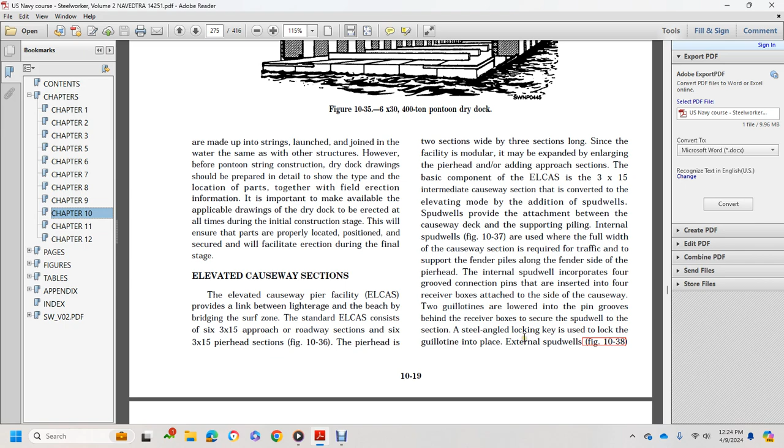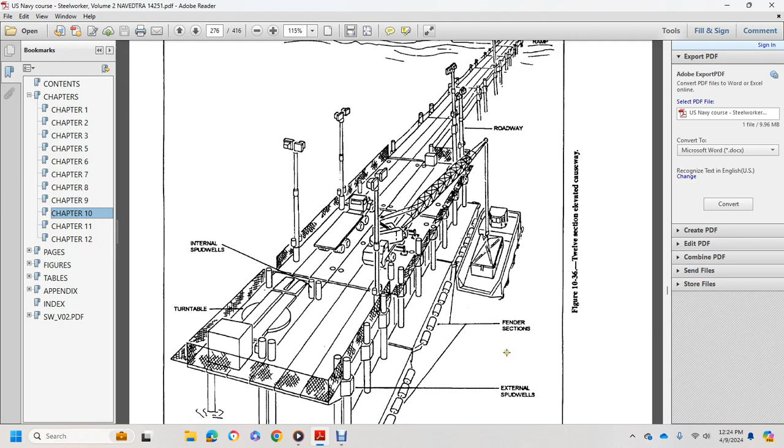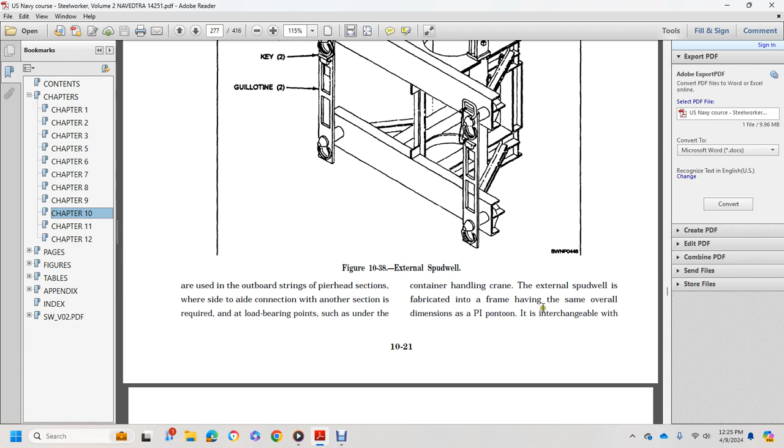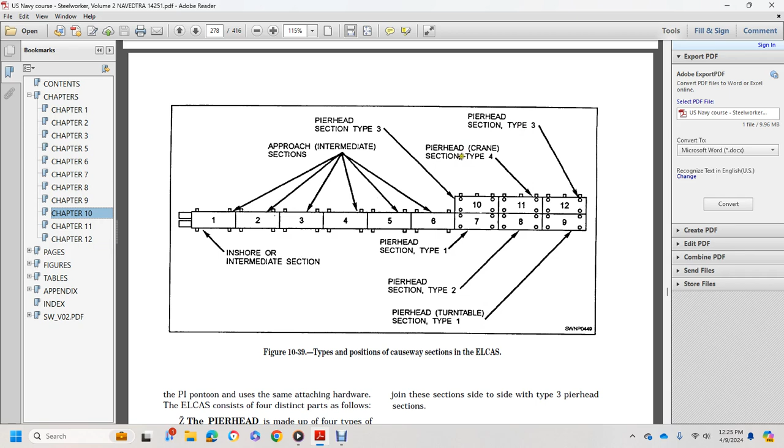They are used on the outboard pier head sections, where a section requires additional load bearing, such as under the container crane. The external spud well is a fabricated frame having the same overall dimensions as a P1 pontoon and is interchangeable with it. Alright, figure 1039, types and positions of causeway sections within the ELCAS. It shows the inshore intermediate section approach, intermediate section, pier head section type 3, pier head section types 1 and 2, turntable section type 1, pier head section type 3, and pier head crane section type 4. P1 pontoons use this hardware.

The ELCAS consists of 4 distinct parts. The pier head unit, made up of 4 section types offshore of the ELCAS, supports the cargo unloading function. The pier head includes cargo offloading from lighterage. A turntable for turning trucks around on the causeway. The fender section provides an interface with the pier head for lighterage. The roadway provides two-way traffic between pier head and beach. The beach ramp provides access to the ELCAS. The section types used are located in figure 1039. Pier head section.

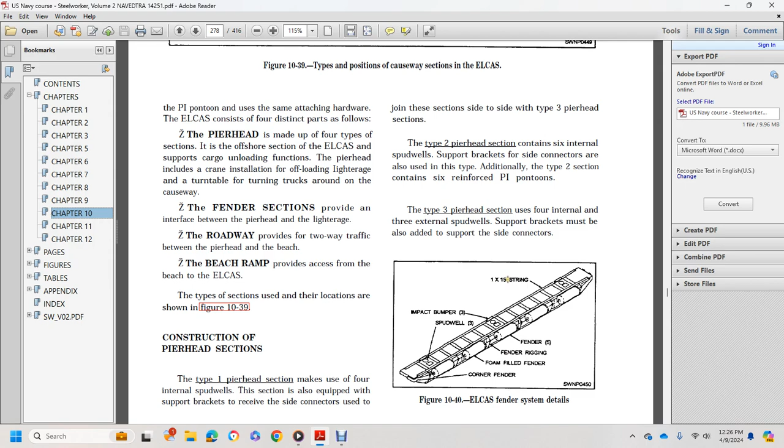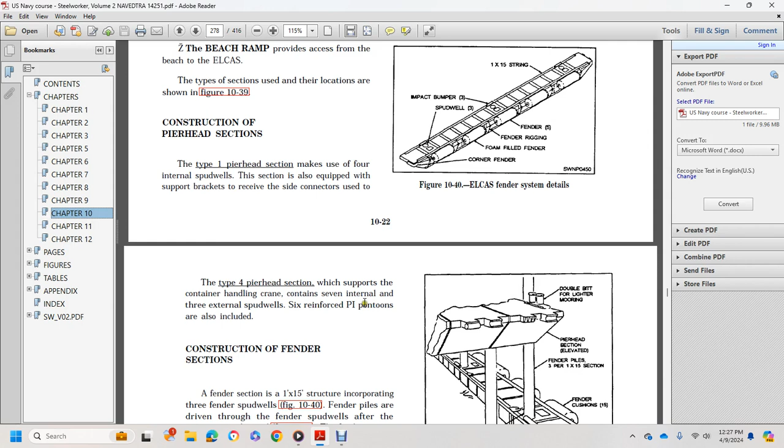The type 1 pier head section makes use of 4 internal spud well sections equipped with support brackets to receive side connectors used to join sections side by side in the pier head. The type 2 pier head section consists of 6 internal spud well support bracket side connectors; the type 2 section contains 6 reinforced P1 pontoons. The type 3 pier head section uses 4 internal and 3 external spud wells; support brackets must also be added to support the side connectors. The ELCAS fender system shows the spud well, corner fender, foam filled fender, rigging fender, impact bumper, 1 by 15 string. The typical type 4 pier head section, which supports a container handling crane, contains 7 internal and 3 external spud wells, and 6 reinforced P1 pontoons are included.

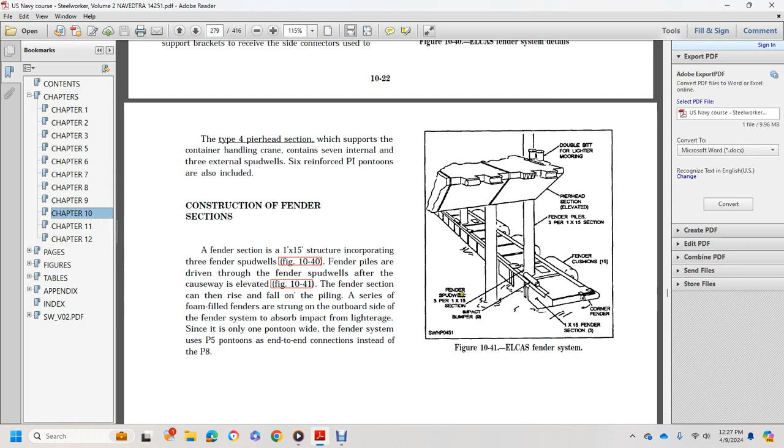Alright, construction of the fender section, a 1 by 15 structure, incorporates fender spud wells, figure 1040. Fender piles are driven in the fender spud wells after the causeway is elevated. In 1041, the fender section can rise and fall on the piling. The foam filled fender strung on the outboard side of the fender system absorbs the impact of lighterage, since it is only 1 pontoon wide. The fender system is P5 pontoons with end connections installed. Figure 1041, ELCAS fender system with lighter mooring, pier head section elevation. Fender piles, corner fender, 1 by 15 fender spud, and an impact bumper.